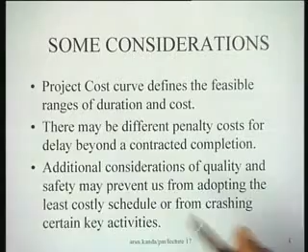Additional considerations of quality and safety may prevent us from adopting the least costly schedule or from crashing certain key activities. This is again a very important consideration, because quality and safety being paramount in certain projects, it is important that we make sure in developing the project schedule that these crucial activities are not unnecessarily crashed.

Now, to accommodate this multifarious scheme of objectives, a goal programming approach can be used. The goal programming approach, as you all know, is in fact an extension of linear programming, and this extension permits us to accommodate a variety of conflicting incommensurate goals. So the goal programming approach allows us to handle multiple conflicting objectives of the kind that we just mentioned. What we essentially have to do is prioritize our objectives appropriately and express them in terms of deviational variables.

You see, prioritization is a normal process by which managers tend to plan their activities. If they have a number of activities to be done, they invariably operate under pressures of limited time and limited resources. So prioritization is in fact very important, and the goal programming framework basically tries to cash in upon that idea of prioritization in developing a practical plan or schedule for managing the project.

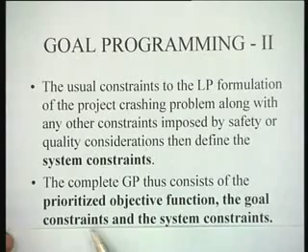Then the usual constraints of the LP formulation of the project crashing problem, along with any other constraints imposed by safety or quality considerations, define the system constraints. The original set of constraints of the LP are retained as such and go in the body of the constraints of the goal program. Finally, the complete goal program consists of, first, the prioritized objective function, then the goal constraints we have introduced, and the system constraints already in the typical LP formulation. So this is broadly the philosophy of goal programming in terms of its capability to handle multifarious objectives.

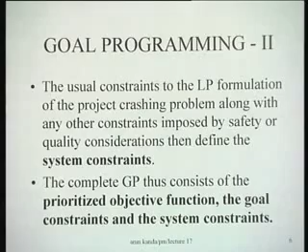Now it would be worthwhile to distinguish between these commonly used terms of goals and objectives. We all have certain goals in life. We are trying to pursue certain objectives. But really speaking, in the context of a rigorous mathematical analysis, we should be clear about the distinction between the two terms.

So what is an objective? An objective generally specifies a general direction to pursue. That's what an objective is. So objective gives me a direction essentially. When you say a linear program has the objective of minimizing cost, that is a direction. Maximize profit, that is a direction. You could be pursuing a certain objective in life, right? And that objective might be, let's say, to be good or to do good. That is an objective which you are pursuing, which is a general direction of pursuit.

So what is, on the other hand, a goal? A goal is a specific milestone on this particular road. So goal is a specific target or a milestone on the road defined by the objective. Right? When I say minimize cost, that's an objective. When I say my target is to bring down cost by half to 3 million rupees by the end of the year, that is a specific target, and that is therefore one particular milestone on this particular road. That is what it is.

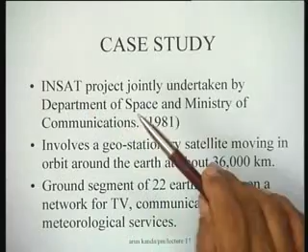Now in order to discuss and present some of the ideas which are involved in goal programming, I'll present a case study that was done by us in connection with the INSAT project, right? The INSAT, the Indian National Satellite Project, which was jointly undertaken by the Department of Space and the Ministry of Communications way back in 1981. What did this project involve? It involved a geostationary satellite moving in orbit around the earth at about 36,000 kilometers.

And this particular geostationary satellite would be able to beam back information to various earth stations, and it was envisaged that there would be a ground segment of 22 such earth stations on a network for TV, communication and meteorological services. That was the intention. The project is of course now complete. The project that we are talking about is a portion of this entire project in which one of these 22 earth stations, located in Calcutta, was to be set up. So the data for the case study refers to that.

Let's see how a signal is communicated. How does communication take place via satellite? There is a city A, and we are interested in sending a signal from city A to city B. The various components through which the signal passes are something like this. From the city A, a message is sent to the tower of the microwave station A, which is located within the city generally. From the microwave station of city A, the signal is sent to the satellite earth station of the city A, which is fairly close to the city, about 30-40 kilometers, just outside the city.

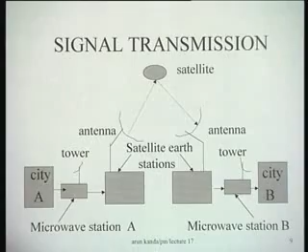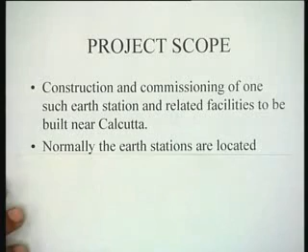The project was really construction and commissioning of one such earth station and related facilities to be built near Calcutta. Normally the earth stations are located away from the main city to avoid interference with radio waves of similar frequencies in the city. That's the reason why the earth stations are typically about 20-30 kilometers outside the city. So for instance, if you're talking about Delhi, the earth stations could be in a place like Gurgaon, or something like that.

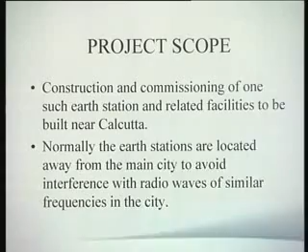Now the main activities in the project were construction of the main building and the installation and testing of equipment. This was one of the major scope of the project. Construction of the microwave station and tower. The assembly and the mounting of the satellite antenna. This was a major activity here. And the construction of staff quarters for the maintenance staff, which is going to stay for the satellite earth station.

Now this particular project was actually modeled as a project network, and the project network drawn in AOA mode had 64 nodes and 85 activities. You can get an idea, it's a fairly reasonably sized network. What was done was that the normal and crash time and cost data was collected for all the activities. So this was the information that was collected for each of the 85 activities. A linear relationship was assumed for the time cost function of each activity.

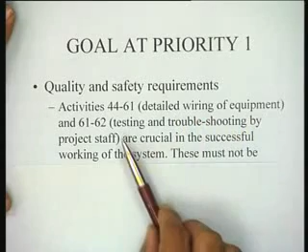By quality and safety requirements, what the management felt was that there were two major activities. Activity 44-61 on the network, which was detailed wiring of equipment, and activity number 61-62, which is testing and troubleshooting by project staff. It was felt that these two activities were crucial in the successful working of the system, which depended upon proper wiring of all the equipment and subsequent testing and troubleshooting by the project staff. So these two activities must not be crashed indiscriminately in developing a schedule, for quality reasons and also for reasons of safety.

So in order to translate this into a workable scheme, it was felt that the first goal that management had to achieve was to target the sum of the durations of these activities at an optimum value of 50 days. It was felt that 50 days was perhaps the optimum time that both these activities should be accomplished in.

Though of course if you want to crash the project, this could go down to something like 35 days. And in the normal duration you would also have maybe something a little more than this. But here we are talking of an optimum duration for both these activities, which would be best for the performance of the activity in that sense.

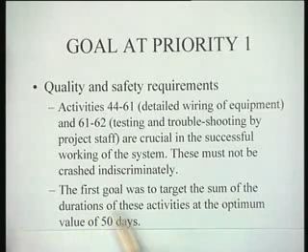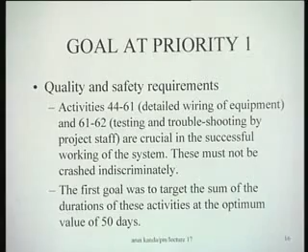So the first goal at the first priority was to ensure that the sum of the durations of these two activities is at an optimum value of 50 days. This was taken as the first priority goal. Now similarly, let's see what the other goals were.

The goal at the second priority was basically a goal to stay within the budget, which is quite a natural goal for management. That means there was a specified budget for performing these activities, and the objective was to minimize the upper deviation of the direct activity cost from the specified budget. That was the intention.

So for instance, you can see that in this case the total direct cost for the project, if you are assuming linear cost time trade-offs, will be Bij minus Aij Xij for all ij belonging to the set of arcs, where this is the cost intercept and this is the cost slope. Aij is the cost slope and Xij is the duration of that particular activity ij, which lies between the normal and the crash limit. This we already know from our previous analysis.

So we want that this total direct cost should not exceed the budget which was specified, and the budget was 7,25,000 rupees for the various activities. So what was done was that the value of the summation Bij for all the activities was computed, and this value was found out to be 11,77,253 as shown here.

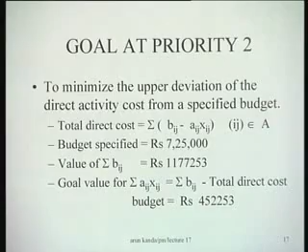You see, the goals that we are talking about are generic in nature. Almost all projects would have these kinds of goals, irrespective of the setting. The goal at the third priority was again to complete the project by the target date, right? And what was the target date? Translated into the number of working days, it comes out to 266 days. This was the target date for the project.

So thus the intention was to minimize any upper deviation from this target of 266 days. We do not want to minimize any lower deviation. We want to minimize any upper deviation from this target. We want to be below 266 days.

If you recall, I had shown you the CT frontier. The range of project durations was something from 350 to something like 260. So 266 was very much within the feasible range of durations that we've seen, and this was the target date for the project.

The goal at the fourth priority was to minimize the total direct activity cost. Now you might tend to think here that this is probably in conflict with the goal at priority 2, where we were trying to stay within the budget, and the budget was 7,25,000, but that was just staying within the budget. At fourth priority is to minimize the total direct activity cost.

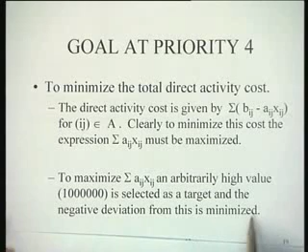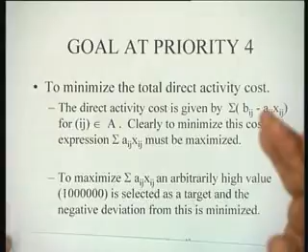So 10 raised to power 6 is selected as a target, and the negative deviation from this is to be minimized, because if I set a very high unachievable target and I try to achieve it, I am trying to maximize my own achievement. That's the idea.

Now these goals were specified by management in the order of priority that we have just discussed, and they have now to be translated into goal constraints. How do you do that? Let's look at these goal constraints. Goal constraints are pretty simple. Let's look at the first goal.

In the first goal we had two activities, right? This was detailed wiring and troubleshooting. In the activity network, this was the 39th activity and this was the 41st activity, just a numbering scheme. So we have a corresponding variable for each. What we want to ensure is that the sum of the durations of these two activities should be equal to 50. The right hand side is 50 days.

But this sum can be anything. It can be less or it can be more. So we have S1 minus, which is a negative deviational variable, and S1 plus, which is a positive deviational variable. In goal programming, you always have the negative and the positive deviational variables.

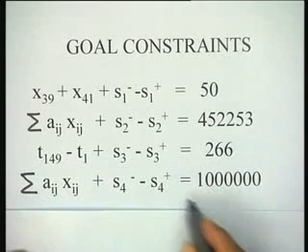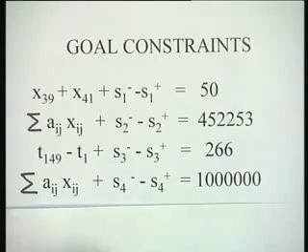But the goal constraints are nothing but accounting procedures. It's like saying that this is my achievement, this is my target. I could either underachieve or overachieve it. So I can measure exactly what my underachievement or my overachievement is likely to be. So we set up the goal constraints in this particular fashion.

Now let's try to construct the goal programming objective function. The goal programming objective function is sort of lexicographic, and it is sort of preemptive, as they say. A preemptive lexicographic objective function means that you have the first priority level, then the second, then the third, and then the fourth priority level. And at each priority level, we try to define what is to be minimized. For instance, at the first priority level, our objective was to ensure that the sum of the activity durations was exactly equal to the optimum level, which was 50.

So I put here S1 minus plus S1 plus both, because when this is 0 as well as this is 0, this is the theoretically minimum value for this objective, and that would correspond to my desired objective of keeping the sum of the durations of the two crucial activities to a level of 50 days. So that is why I have kept both the variables here.

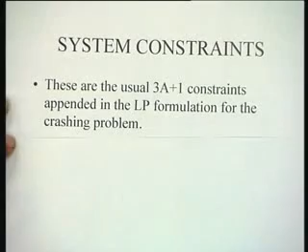Now as I just told you, the goal programming objective function along with the goal constraints has now to be appended to the usual system constraints. So which are the typical system constraints for this problem? The system constraints for a typical project crashing problem are the usual 3a plus 1 constraints in the LP formulation for the crashing problem. These are precedence constraints: Ti minus Tj plus Xij must be less than or equal to 0 for all the arcs.

Then you have Xij must be less than or equal to the normal duration for each arc. Then Xij must be greater than or equal to Lij, which is the lower or crash duration for each arc. And then there is a constraint saying that Tn minus T1 is equal to T, where T lies in this particular interval. You impose this constraint by fixing a specific value for T, isn't it? You say that the project duration lies between the crash duration and the normal duration. So this is a parametric program.

But if you are going to have a duration goal or a budget goal, then this constraint need not be appended in the system constraints in the goal program. If you have a goal constraint which says that the project duration should be 266 days, as we say here, this need not be imposed in this particular case.

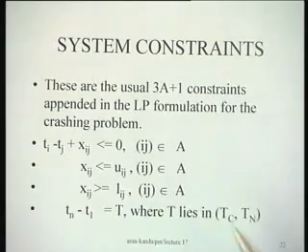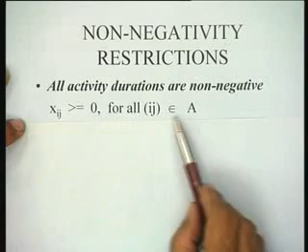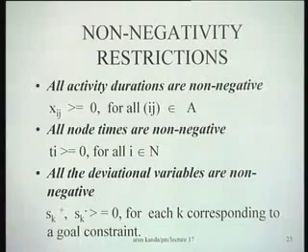So then we have the non-negativity restrictions. The non-negativity restrictions for the problem are that all activity durations are non-negative, that is Xij should be greater than or equal to 0 for all ij belonging to A. All node times are non-negative, right? All the deviational variables, there are 8 deviational variables now, 2 corresponding to each goal. So Sk plus and Sk minus are both non-negative for each k. This defines the various types of non-negativity.

So the structure of the complete goal program is: minimize the goal programming objective function which we have developed in terms of the 4 priorities, subject to, number 1, goal constraints. There are 4 goal constraints in this case, 1 corresponding to each goal, which we have developed in detail. Then there are system constraints, ignoring Tn minus T1 equals T; because there are 85 activities, there are 255 constraints corresponding to the system here, right?

Similarly, there are the usual non-negativity restrictions on 64 plus 85 plus 4, that is 153 variables for this problem, right? So this is the complete structure of the program. And remember that the AOA network for this case study had 64 nodes, 85 activities, and of course 4 goals. So the total number of variables was 153 for this particular case.

You are already familiar with system constraints and non-negativity, which are used in the LP formulation. The only additional constraints that we have appended are the goal constraints, which are 4 goal constraints, and the objective function for this particular problem. So this particular goal program with this structure was solved for the case study that we just presented. The final solution was something like this.

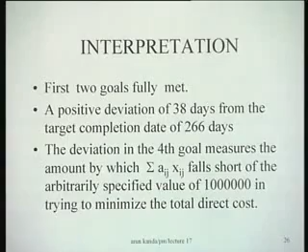So let's quickly look at the interpretations. The first 2 goals are fully met in the solution. A positive deviation of 38 days from the target completion date of 266 days. The deviation in the fourth goal measures the amount by which summation Aij Xij falls short of the arbitrarily specified value of 10 to power 6 in trying to minimize the total direct cost. This was what we had seen.

Of course, we could calculate the total direct cost, which is this quantity; the summation of this value is known, and it is falling short of this by so much, right? This was the value that you got. So you know this particular value for Aij Xij. So the total direct cost was actually equal to 7,25,000. That is what it was exactly.

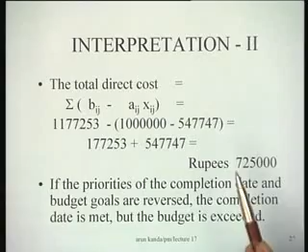Now if the priorities of the completion date and the budget goals were reversed, the completion date is met but the budget is exceeded. So you can see very clearly that in this case we are exceeding the target duration by 38 days but confining ourselves to within the budget. But if we reverse these priorities, the reverse thing happens.

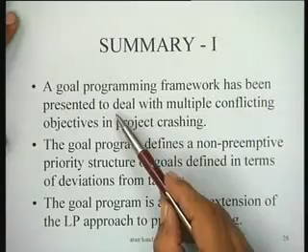So finally we can summarize the approach by saying that the goal programming framework has been presented to deal with multiple conflicting objectives in Project Crashing. The goal program defines a non-preemptive priority structure of goals defined in terms of deviations from the targets. The goal program is a natural extension of the LP approach to Project Crashing. The goal program consists of a prioritized objective function, the goal constraints, the system constraints, and the non-negativity restrictions.

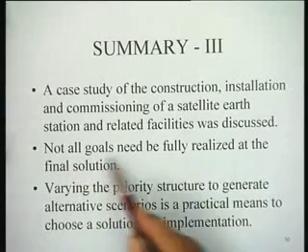And the goal program can be solved by any one of the many commercially available computer packages. So solution is really not a problem. Trying to formulate your problem in the goal programming framework is the major thing. A case study of the construction, installation and commissioning of a satellite earth station and related facilities was discussed. Not all goals need be fully realized at the final solution.

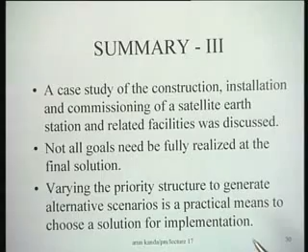And varying the priority structure to generate alternative scenarios is a practical means to choose a solution for implementation. So one can really do a kind of sensitivity analysis by varying the priorities, just as I indicated: if you interchange the cost and the duration goals, the duration can be met, but the cost would be exceeded, and then you can see whether you are really in a position to spend additional money for achieving the duration or not. So these are very practical means for dealing with multiple conflicting objectives.